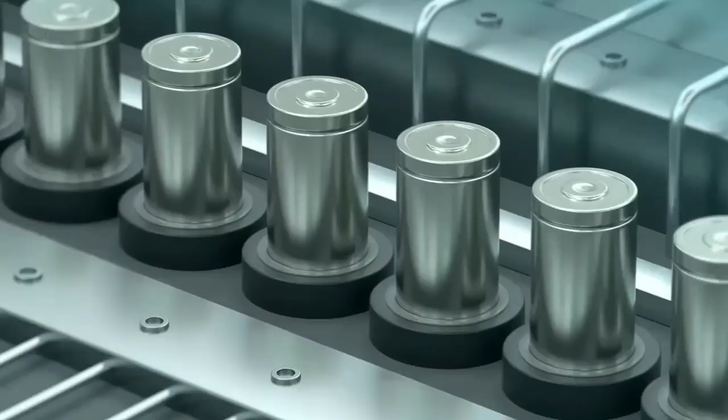There are some real downsides to today's lithium-ion batteries, stumbling blocks that are the focus of international discussion. The batteries can overheat through thermal runaway, which can result in devastating fires and explosions. They operate best in a fairly narrow temperature range, between 15 and 35 degrees Celsius. And the lifespan of lithium-ion batteries is limited to between 7 and 10 years, depending on their application.

On top of that, lithium-ion battery manufacturers are at the mercy of both supply and pricing of a range of critical metals. Take lithium, for example. It's the most critical component of a lithium-ion battery, and the price has jumped sixfold since the start of this year, 2022, adding upwards pressure to production costs.

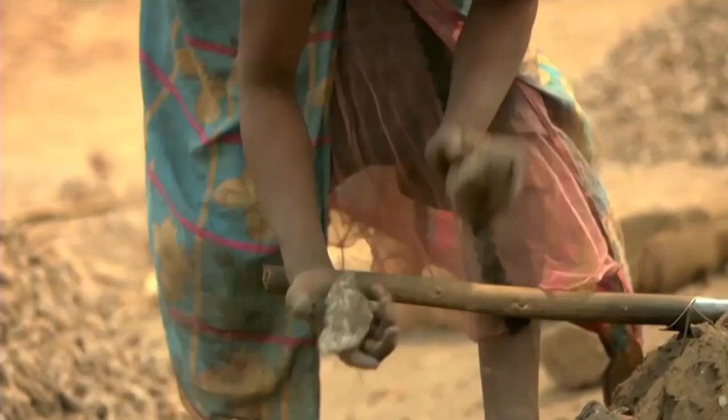Add to that, cobalt is considered the greatest material supply chain risk for the industry in the short to medium term. And whilst the Democratic Republic of Congo produces about 70% of the world's supply, human rights abuses continue to raise ethical concerns. There are also supply chain concerns around graphite and copper, which make up the anode part of the battery. The industry is heavily reliant on China because it produces 90% of all graphite anode material.

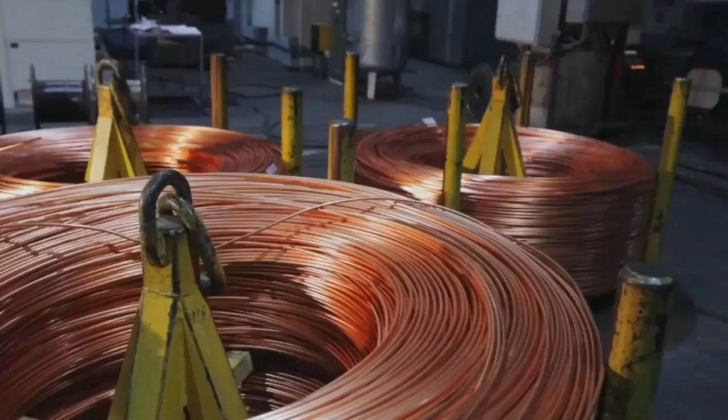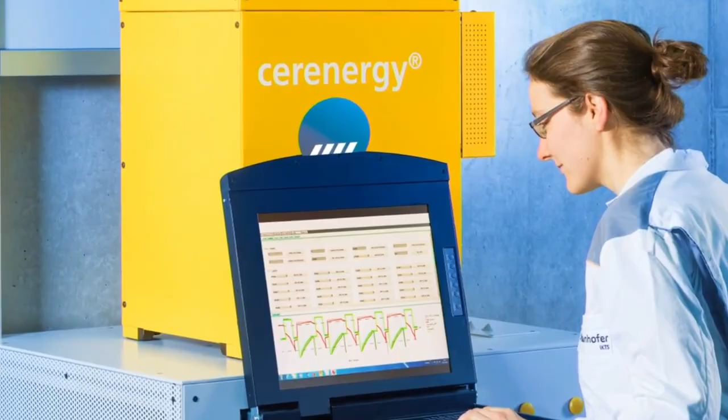Therein lies geopolitical risk. A standard electric vehicle requires 2.5 times more copper than a standard internal combustion vehicle. A recent report suggests there aren't enough copper mines being built or expanded to provide all the copper needed to produce electric vehicles into the future. But an alternative does exist. The solution is Altech Chemical's CERENERGY battery, which uses sodium alumina solid-state technology.

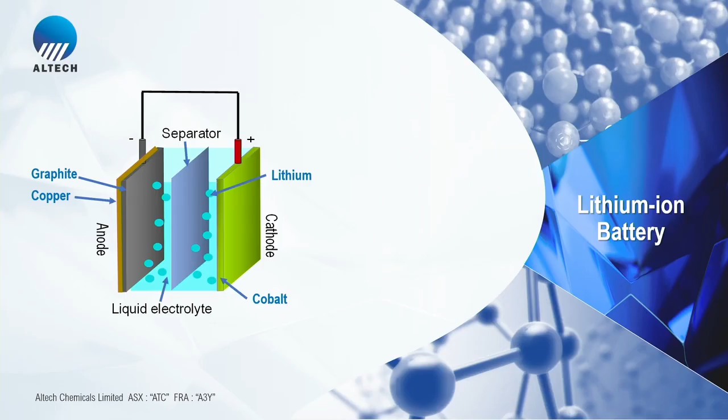So you probably spend a lot of nights wondering this question. What is the future of grid storage batteries? But before I talk about that, I want to talk to you about solid-state technology. Who understands solid-state technology? The industry, the lithium industry, has been trying to move to solid-state technology.

And in a lithium battery, there is a positive terminal and a negative terminal, the anode and the cathode. And in between that, there is a liquid electrolyte, which is flammable. There is also a plastic separator, which is also flammable. And that is causing the problems with battery fires, and that's why the industry is trying to remove that flammable material and replace it with solid-state technology. So solid-state technology is essentially a ceramic piece that allows the lithium ions to transfer back and forth.

As in the video, you can see the problems with battery fires and explosions. That is essentially thermal runaway, and it may be caused by overheating, physical damage, or overcharging. But when it takes off, it's nearly impossible to put out a lithium-ion battery fire. Why is that the case? Because it generates oxygen at the cathode end of the battery. So in a normal fire, you douse the fire, take the oxygen away, and you put the fire out. In a lithium-ion battery, it generates oxygen. So that's one of the major problems with that.

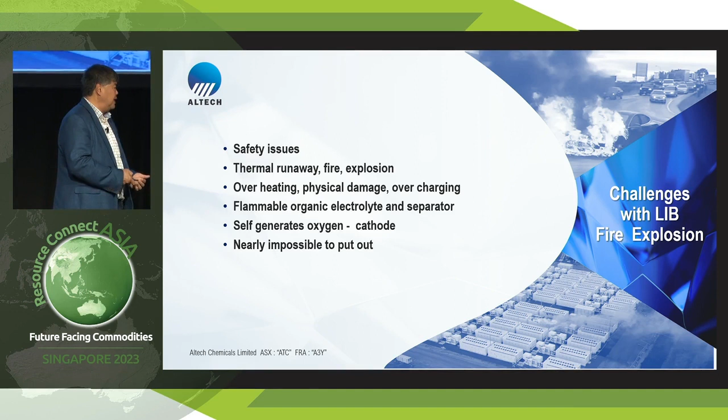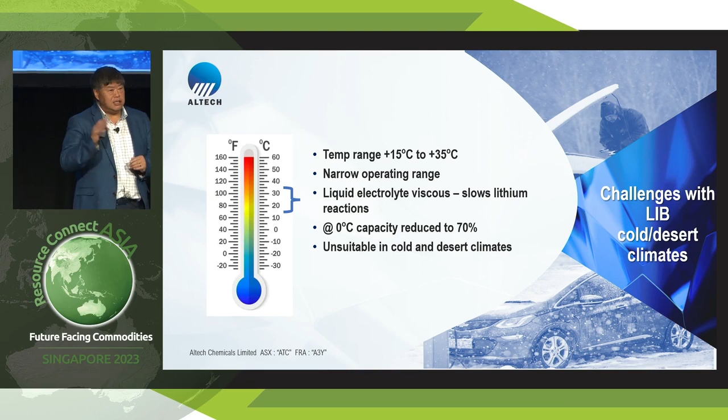The other thing is that a lot of people don't realize lithium-ion batteries only operate in a narrow temperature range, about 15 degrees to 35 degrees. When you get down to 0 degrees, actually your battery operates at 70% capacity. So that's a problem. The other issue is that lithium degrades every time you charge and discharge a battery. There are side reactions, and so generally a battery lasts for 8 to 10 years in the EV sector or the grid storage sector.

Now, I know there's lithium companies in here, and they love the price of lithium shooting up fivefold in the last couple of years. But this has put a lot of pressure on the lithium-ion battery industry. The other main concern is the ethical concerns of cobalt supply. So 70% of cobalt comes from the Democratic Republic of Congo, and there are child labor issues, and the industry is concerned about those. Finally, 90% of graphite is actually supplied by one country. So 90% of graphite comes from China, and it represents a geopolitical risk for the industry.

Copper is the final puzzle. 2.5 times copper is used in an electric vehicle compared to an ICE vehicle. And there's a recent report that said there's not enough copper mines being developed to even meet the electric vehicle demand going forward. So is there a battery that actually is totally fireproof, has a life of beyond 15 years, operates in a large temperature range, has no lithium, no cobalt, no graphite, no copper, and no manganese?

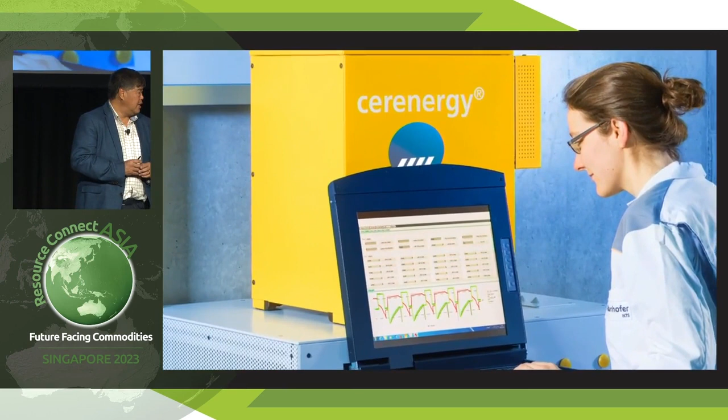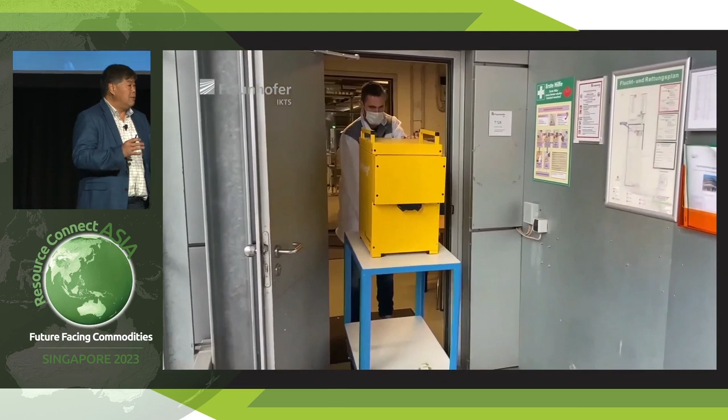Ladies and gentlemen, this is the CERENERGY battery. A sodium chloride salt battery was developed by the Fraunhofer Battery Institute out of Germany. They've spent nearly 35 million euros in research and development, another 25 million euros in pilot plant work, and they were looking for a partner to commercialize it. And we are that partner.

So number one, remember I said the flammable liquid? Our batteries are solid-state technology, so we don't have a flammable liquid. We use a ceramic tube as the solid electrolyte. So there's no thermal runaway. It is totally safe. It doesn't generate oxygen at the cathode end, so totally fireproof.

Number two, it operates at a wide temperature range. It can operate down to minus 40 degrees. Why? It's because we don't have that liquid electrolyte, and it also has its internal temperature. So it operates at 270 degrees on the inside of the battery. It's fully insulated, you can touch it, but that's like a mammal. It regulates its own temperature. So you can operate this battery in really cold climates.

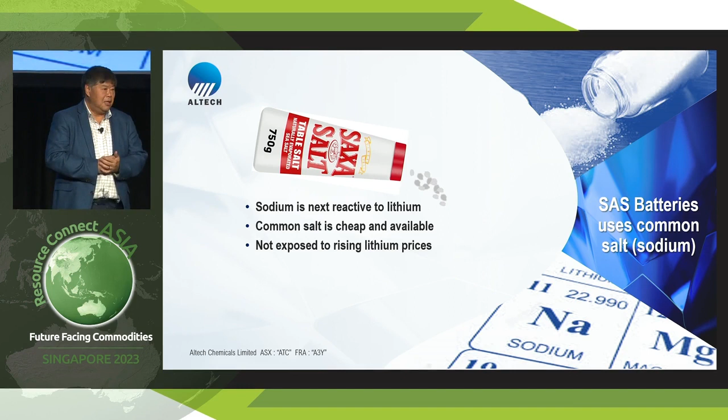Because we don't have the liquid electrolyte, it's solid-state technology, the sodium ions don't break down. So we have more than 15 years life of this battery. So we use sodium ions, which is in salt, and if you know your periodic table, sodium is just under lithium, and it's actually a very reactive material. And common salt is already available, it's cheap, and that's one of the big advantages.

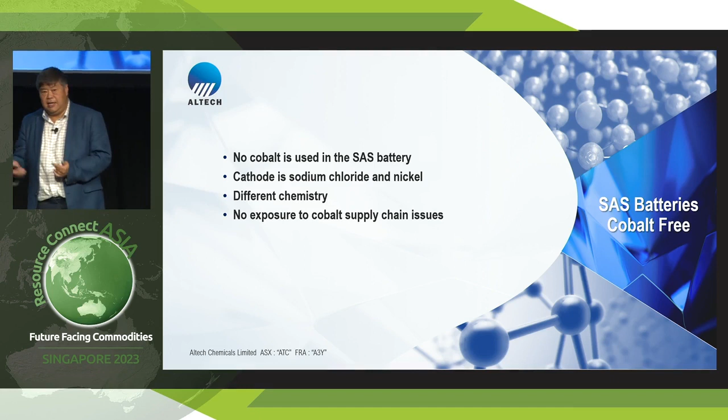We also don't have cobalt. Our chemistry doesn't require cobalt to have the power of the battery. It's very similar to the lithium iron phosphate battery. So we're really not exposed to the cobalt supply chain. And finally, it hasn't got an anode. It's a self-forming anode. So we don't have graphite and we don't have copper. So that's a real big advantage.

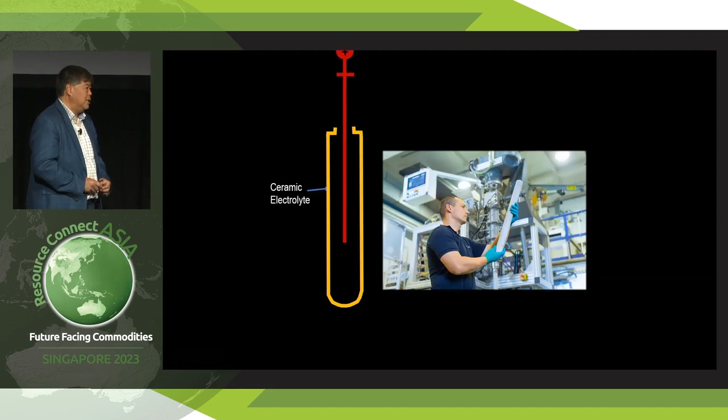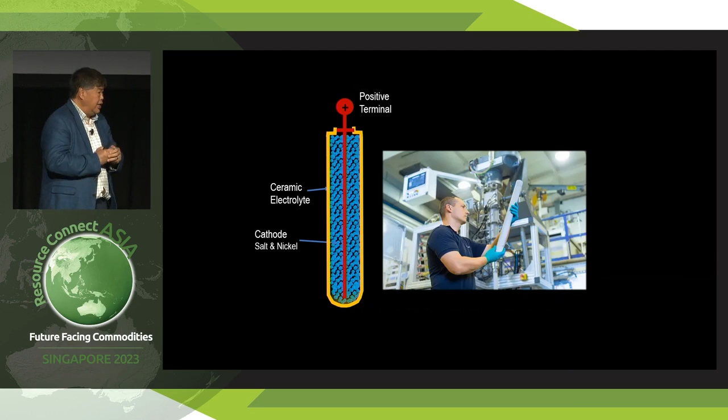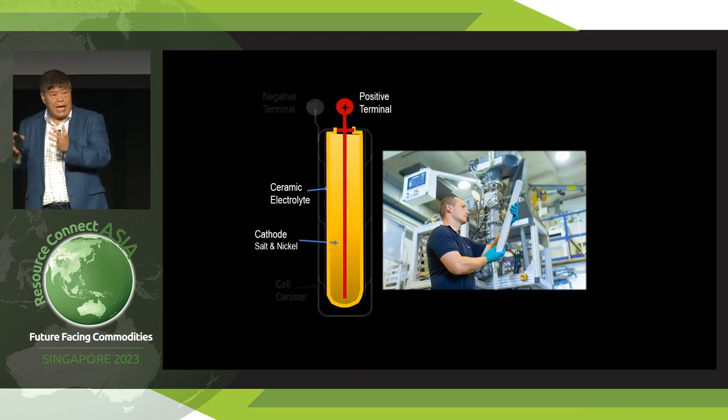So let me talk about the chemistry. It's really neat technology. So essentially, we have a ceramic tube. That's the solid-state electrolyte. We add salt to it and nickel metal powder. And that essentially is the cathode end of the battery. It then sits in a metal cylinder. And that cylinder acts as the negative part of the battery. Now, the batteries are 250 watts. And essentially, that's what it looks like. The ceramic bit sits into the metal canister.

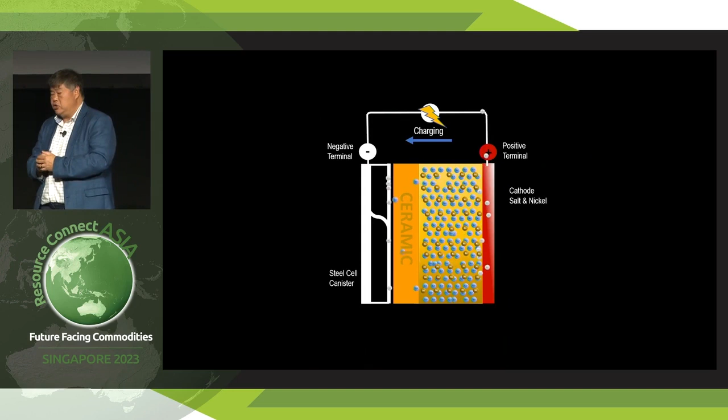Now, this is what happens when you charge the battery. The sodium ions migrate through the ceramic piece. It leaves the chloride behind, and the nickel grabs the chloride and becomes nickel chloride. The sodium forms on the other side of the battery as molten sodium, and when you discharge the battery, it dissolves away. So it's a self-forming anode.

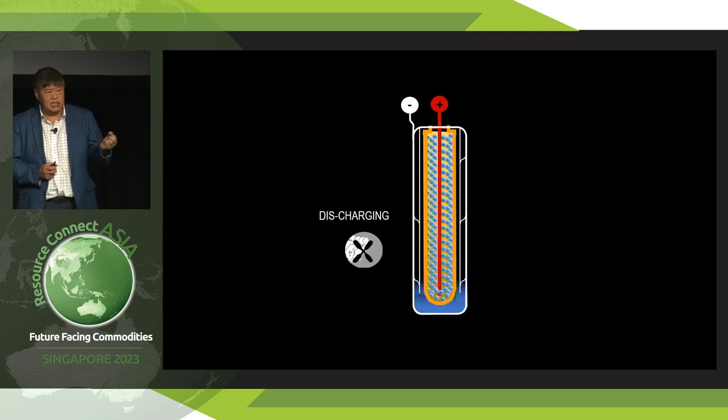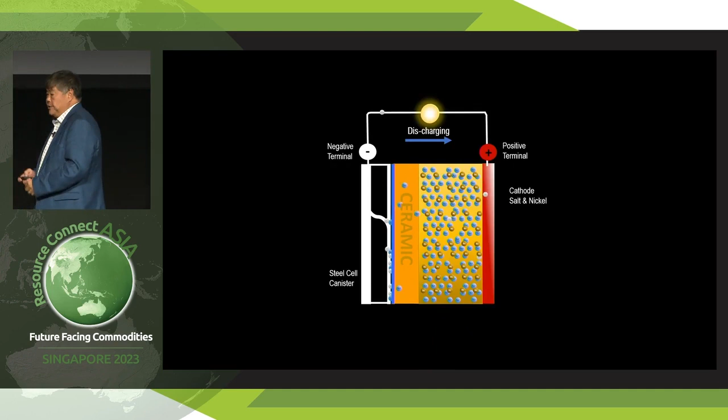And this is what it looks like. When you charge, it forms an anode. When you discharge, it dissolves the anode. So that's why we don't have to have graphite or copper on the anode part of the battery. And this is when it's discharging. The sodium ions go back, grab the chloride ions, and become salt again.

Well, how does this battery stack up with other batteries? If you look at lithium iron phosphate battery or the sodium or the redox flow battery, it's very similar energy density to lithium iron phosphate batteries. Very similar energy conversion, but no maintenance costs, much safer and lower capital costs.

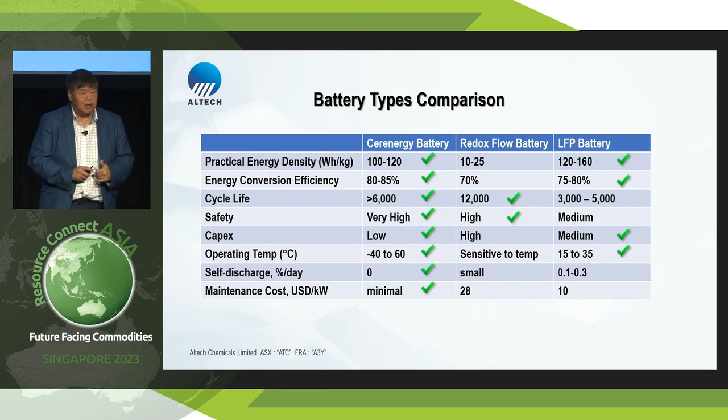If you look at the curve of where these batteries sit, you can see the lithium-ion battery on the right-hand side are cobalt nickel batteries, lots of power, and the bottom part of that is more energy, so not necessarily a lot of power. Our batteries sit in the middle of that.

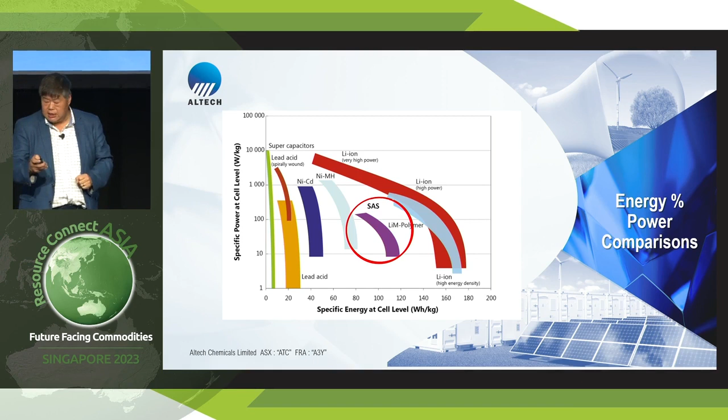All right, the batteries that we're going to produce are only destined for the grid storage market. We're not interested in the EV market. It's overcrowded. The grid storage is the market you want to look for. It's a very early stage market, but as my friend Joe Lowry said in his presentation, the grid storage market is going to grow 20 times in this decade.

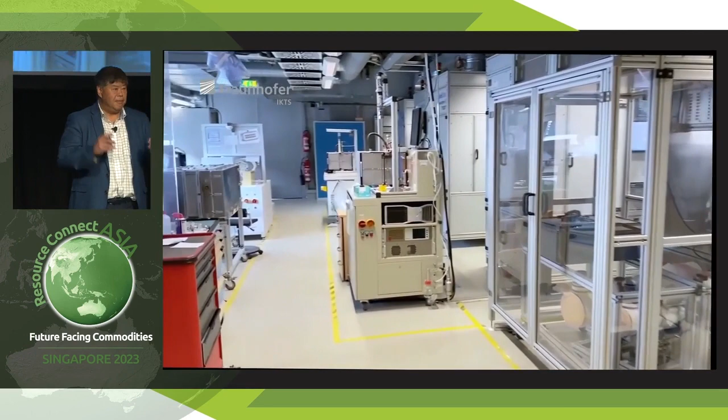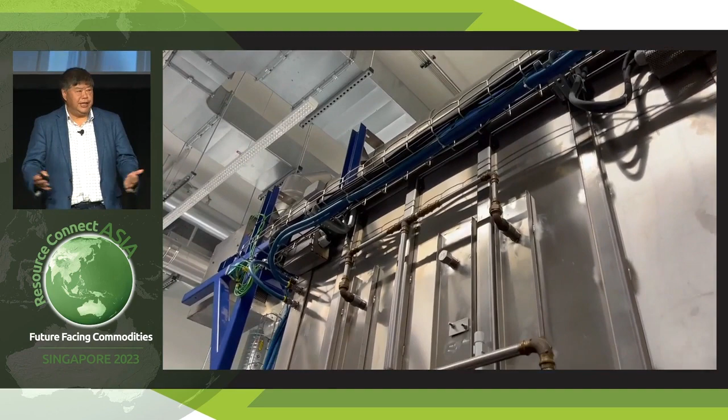So we're ready to commercialize this. This is some of the video of the pilot plant that was built by the Fraunhofer Institute out of Germany, and they have produced these batteries and they're operating. So it's not an R&D program, it's actually been produced and performing. Our job is to commercialize it and build the first 100 megawatt battery plant in Germany.

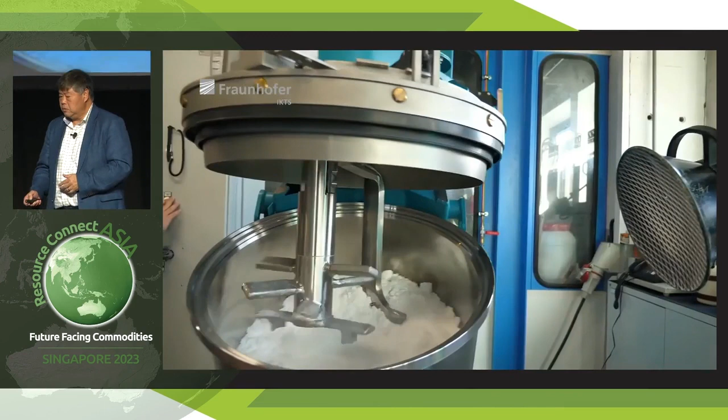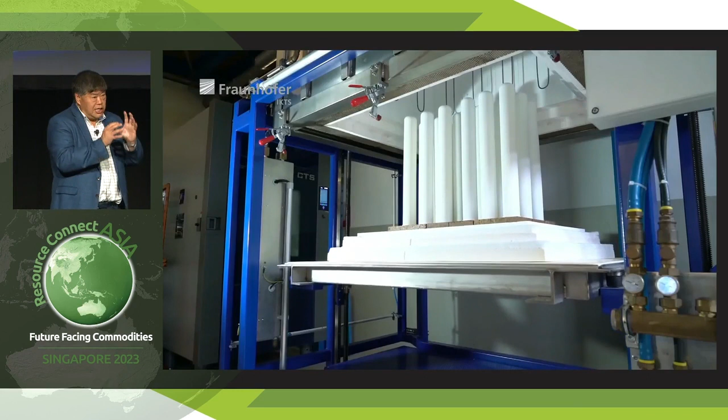Okay, so part of the technology is mixing the alumina powder to make that ceramic tube. The key technology is making that ceramic tube that allows the sodium to go through. It's like creating channels within that.

So what's the cost of the batteries? The Fraunhofer Institute have estimated it should be 40% cheaper to make these batteries. Well, it sort of makes sense, right? We don't have lithium, we don't have copper, we don't have cobalt, we don't have manganese, we don't have graphite. So it sort of makes sense.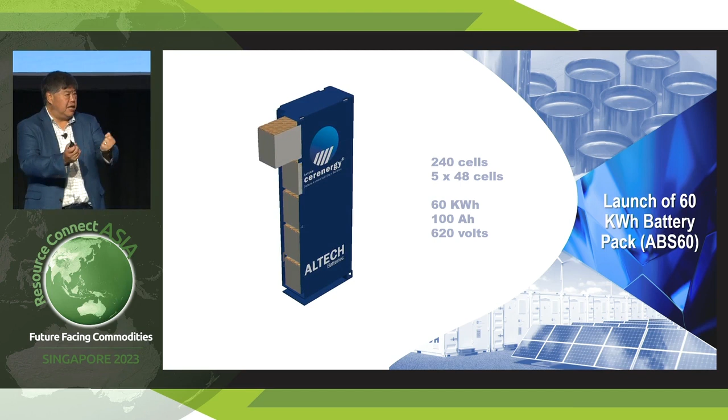Our first product is actually a 60 kilowatt hour battery. It contains about 240 of these cells, about 600 volts, and this is our initial product. What's unique about this is there are 5 shelves and there are no moving parts.

Now, the problems of the grid storage market today is there is an extensive time to install these batteries. It's complex to put 20 of these batteries on site, to configure it up. The noise of the cooling fans of these batteries is a problem. It takes a lot of valuable space, and it requires a lot of regular maintenance. So at Altech, we've solved this problem, and last week we launched this.

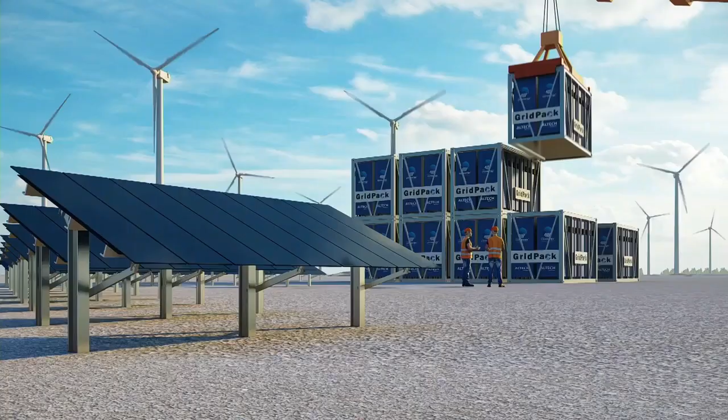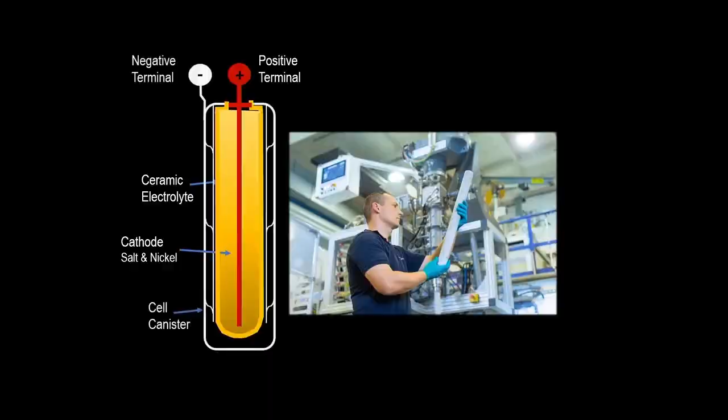In a breakthrough for battery technology, Australian company Altech Batteries has launched a design for a 1 megawatt hour sodium chloride Cerenergy battery pack destined for the renewable energy storage market. The product, called GridPack, uses an innovative new sodium chloride battery technology. One of the unique features of these batteries is that there are no moving parts, such as cooling fans, like in lithium-ion battery packs. They're totally silent and can be installed close to residential neighbourhoods.

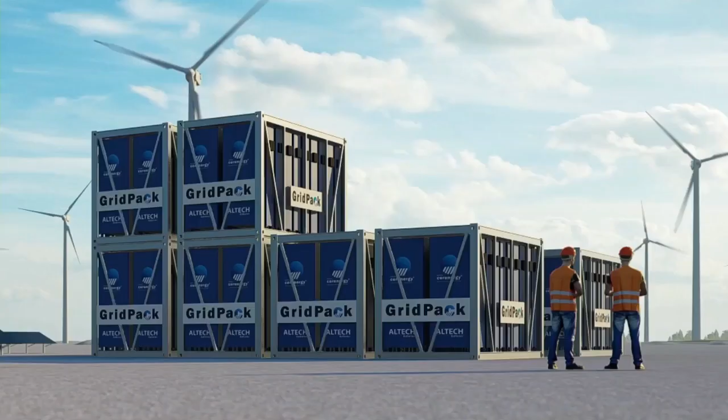These innovative batteries can even function in extreme temperatures, from frigid cold to scorching desert heat. They also have a lifespan of over 15 years. That's nearly double a lithium-ion battery. The plug-and-play feature of the site installation for the grid packs ensures that they can be easily installed in remote locations. Additionally, the containers have been designed to be stackable, which minimises the battery footprint.

So, ladies and gentlemen, within 5 minutes of arriving at your site, we can have 1 megawatt of battery connected to your grid.